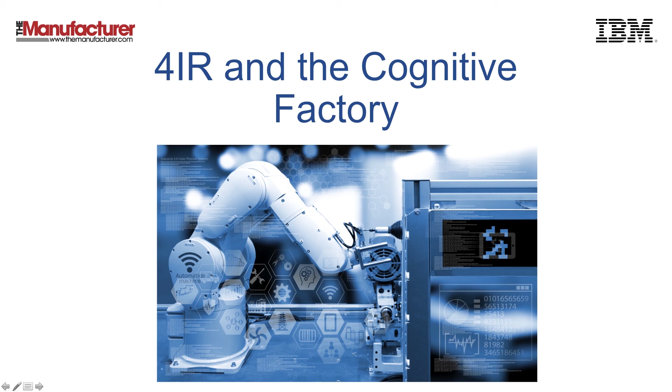And the idea of the cognitive factory. We're going to be taking a look at how factories can start to encompass elements such as machine learning and artificial intelligence.

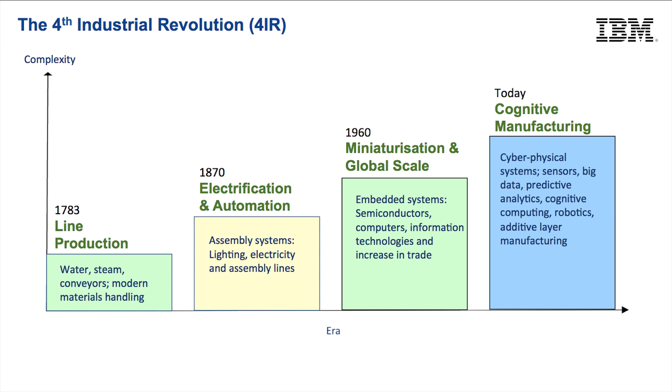And with that, I'd like to hand over to Keith Jackson, Chief Technology Officer of Meggitt, who's going to take us through some of the work that's been going on within Meggitt. Thank you, Graham. That's a very good introduction.

Today, I'd like to talk to you a little bit about Meggitt and our interpretation of Industry 4. And I deliberately say our interpretation because, as Graham said, it's got a very big scope, and there's a lot of confusion about what it is and what it means to different businesses. It ranges from additive layer through to how you feed information to your designers, how you manage your supply chain, how you optimise your factory, research around data standards and data security. And a lot of people I talk to about Industry 4 get quite confused by the whole thing because the scope is quite vast.

But the one thing you can be fairly sure of as you look at this is things are changing. We're experiencing this in our normal lives, whether it's through mobile data or cloud computing or the analytics and information built up behind it. We can see that the velocity and veracity of data is changing, and it's not just changing here, it's something changing globally with a globally connected world. That's interesting for us because it's pace, and it's a real pace, and it's an opportunity. But it's also a risk, and we have to be careful about that and understand the risk.

We just need to reflect a little bit and say, from a manufacturing industry point of view, and where we sit with our credibility and success ratios, what we're now doing is perhaps crashing that together with an IT industry. And an IT industry has a very different pace of development and a very different success ratio in the number of successful projects to unsuccessful projects. So we have to go into this with our eyes wide open about how we make this work. We also need to understand that some of the people in our normal manufacturing organisations may not be 100% equipped to take us on this revolution or journey, because it's quite different to the journey that we go through.

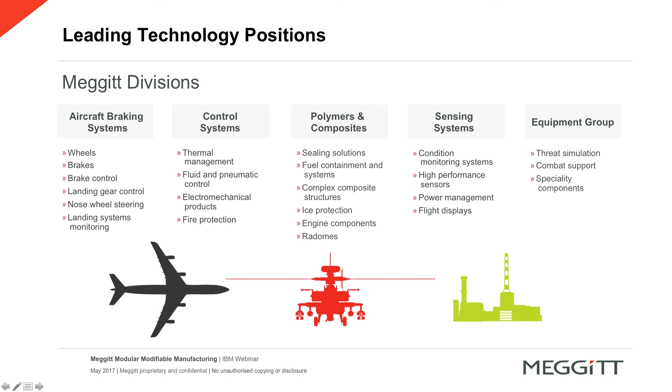So we started with our first Industry 4 application, a workbench called CLAAW - a closed-loop adaptive assembly workbench. What we tried to do with CLAAW was apply a lot of existing technologies to help our engineers do a better job of building their products, but also help us learn from what they know and capture that knowledge. We went into it very clearly from the start - this was about helping, assisting, learning, and doing a better job.

One of the things I'll talk about later is that if you're going to start analysing data, you need good quality data, and that data's got to be at the right precision and sampled at the right time. The best way to ensure it's sampled at the right time and at the right precision is to do it passively and automatically in the system.

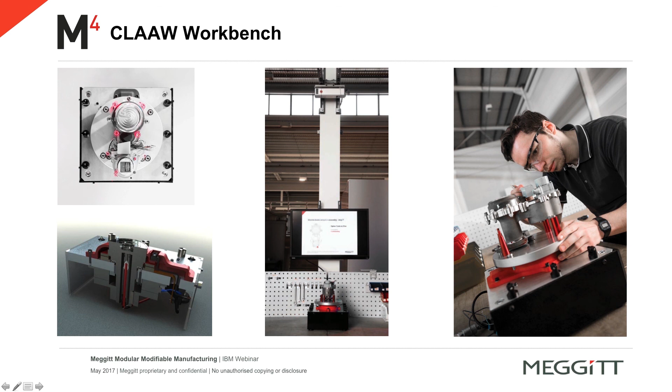That's one example of our manufacturing process, the manual assembly operations. But we extended this thought to say that's only looking at a bit of the process. The entire process of how you make a factory, for us, uses digital data to optimize the factory. How do we understand scheduling? How do we understand the best routing of our products? How do we improve as things go through manual assembly, testing, machining, painting, stores, inventory? Collecting all of that information is something we want and need to do.

We talk about how we collect that passively without user involvement, not because we don't trust the users, but we want to collect that data to the right resolution at exactly the right time so we can put analytics on it. We also think about how we engage with our people in the factory so they see this for what we want it to be: something positive about the quality and productivity we can get through their factories.

We all accept using apps on our phones to find our way to a restaurant or to the theatre, but using those mobility apps within the manufacturing environment, and how that helps us do our job, is perhaps an even more powerful use for us, and people can engage in a positive way.

An interesting thing that comes out of this is we can make things smart, even the boxes our products are carried in. If you've got a box that's tagged and you know where it's been and where it's going, it may not even have local processing power, but you've built up intelligence and knowledge about that box and its journey as it's made its way through the system.

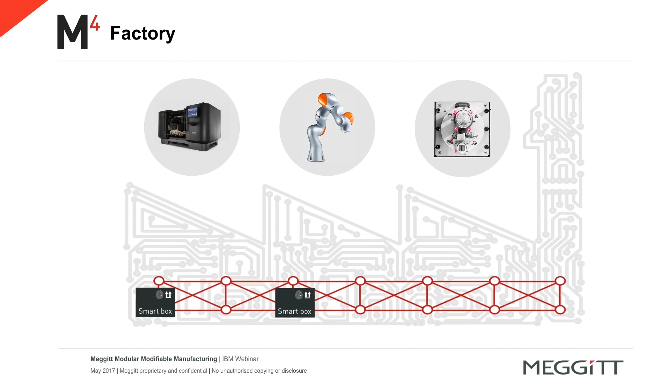It's particularly relevant for our sort of business where the volumes are not huge. In consumer electronics or automotive, where you're running a lot more product through your lines, your statistics will help you. Statistics doesn't necessarily help us in what we're trying to do.

And when you think about the precision of it, you need the data, but you have to think of the cost to gather that data and the value you get out of it. If I can come up with a clever scheme which saves me £100,000 in my supply chain, but it costs me £20,000 per year to implement and manage, you can quickly see that after 5 years it wasn't such a good idea - which reflects back to the beginning: think about what you're trying to do, think about what's necessary for your business.

So that's a quick canter through what we've done at Meggitt. Just to summarise: from our point of view, Industry 4.0 is a really big topic that means many things to many people, but we thought about what we want it for, what we need it for, and were very clear about the problems involved and what we're trying to tackle. Then we thought about the solutions and the data, and we've also recognised where we haven't had the skills to do what we want to do - we've had to bring in expertise from outside.

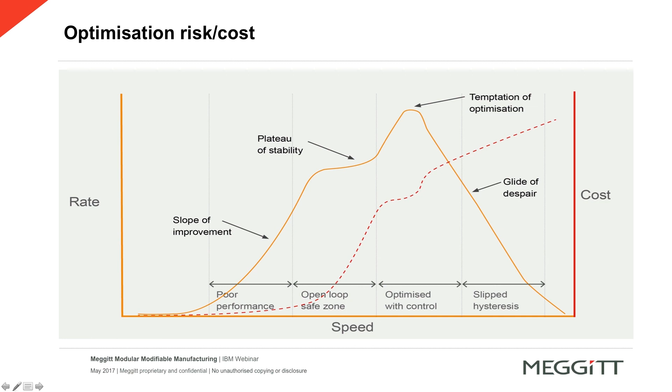We are a manufacturing and engineering company in our specialist aerospace market. We have a great deal of skills, but we've had to bring in some extra counsel to help us with some of the data problems around it. So with that, I'd like to say thank you very much. I hope you found it interesting, and hand back over to Graham.

Keith, thanks very much for that really fascinating summary and insight into the work that's going on within Meggitt. I'd like to follow on from some of the themes that Keith's introduced to look at IBM's perspective on the scope of what cognitive manufacturing covers, where it can deliver business benefits, and perhaps how to simplify and demystify the implementation.

So there are a few steps that come to mind when considering moving into cognitive manufacturing. And fundamentally, we start with the data, whether that comes from new sensors that are instrumented in your factories, or whether it comes from existing data that's in your manufacturing ecosystem, such as the typical systems that we find in manufacturing execution systems, enterprise resource planning systems such as SAP, and also enterprise asset management systems such as IBM's own Maximo. However, a lot of this data doesn't currently talk to each other. They're used for their own specific purposes and they remain in their own silos.

So the concept of moving towards a cognitive manufacturing environment is to break down those barriers between data. So now your MES information can talk to your ERP system, which can talk to your enterprise asset management system, and this gives a much better understanding of your entire manufacturing system.

So the first level, typically, of cognitive manufacturing is to make the data you've gathered transparent. That is to say, the use of various visualization tools to see how the data comes together and how they interact with each other. And that allows you to start to distinguish some patterns that you see in the data.

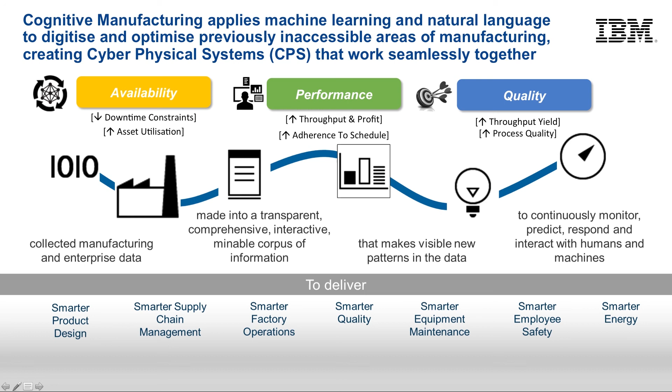Moving on to this next slide, we take the information from those IBV studies, as well as conversations we've had with our clients, with industry experts and with analysts, and we've identified three major pillars of manufacturing value. And it's these pillars that have underpinned the industry solutions that IBM's developed. So here we're looking at use cases that are purpose-driven and specific to a business need. And we can use the Watson IoT for manufacturing solutions to drive those manufacturing operation improvements.

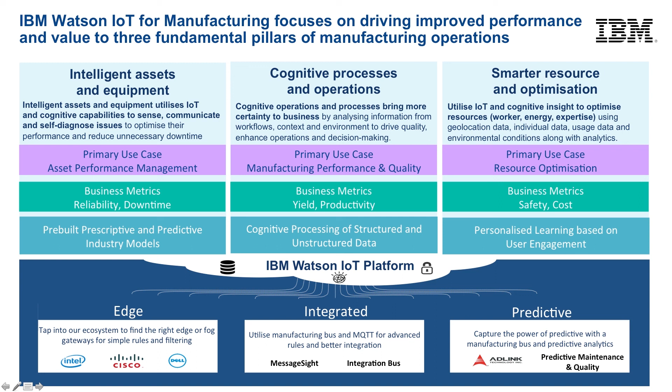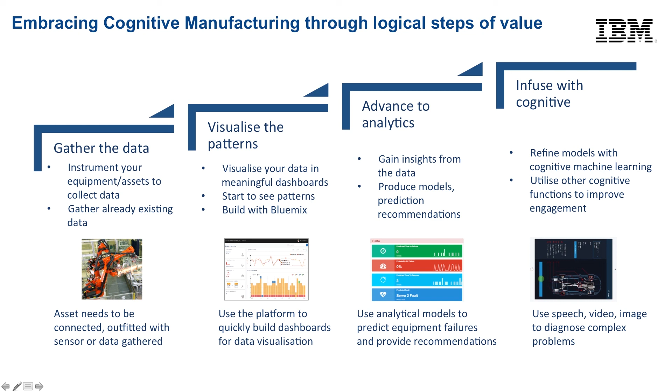Graham, thanks very much. That's terrific. Bless your heart for that. We've got some questions. I want to start with one, Graham.

It's inevitable, obviously. When people talk about connected anything these days, they worry about security. We've just had that recent WannaCry ransomware attack. Obviously, people are going to be saying, yes, we want to get connected, but what about security? What considerations do you recommend when implementing cognitive manufacturing? What approach should manufacturers take under these circumstances?

It certainly is a risk that everybody going down this path needs to be aware of. I'd say the approach we've developed and would recommend to people is a sort of 4-step approach. You may well need to bring in external security consultants who have experience with security on SCADA and PCS systems, but you may have those people within your own organisation. The first step would really be around an audit and assessment of knowing what you need to protect and how you're going to do it.

Then secondly, to look at developing secure business solutions. The implementation of the Internet of Things into the industrial domain could open up new vulnerabilities or ingress points that hostile agents, as Keith mentioned, could try and exploit to get access to your core systems, to your IP. But there are many tools on the market. IBM has its own security portfolio, but you need to have clear and up-to-date security solutions into that domain.